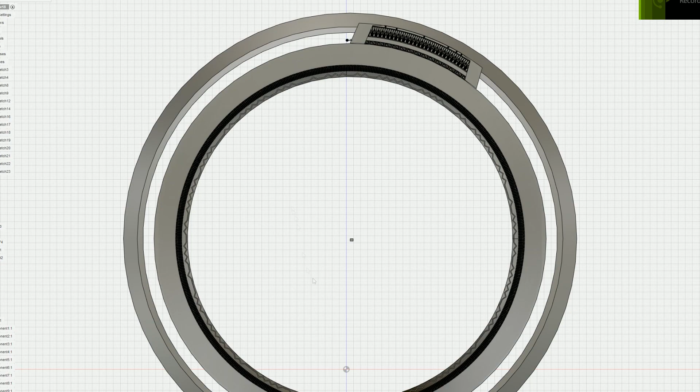Hello and welcome to the first part of a 3 or 4 part series focusing on the design and building of my Working Stargate Miniature Project. In this first part, a progress log of what I've done so far.

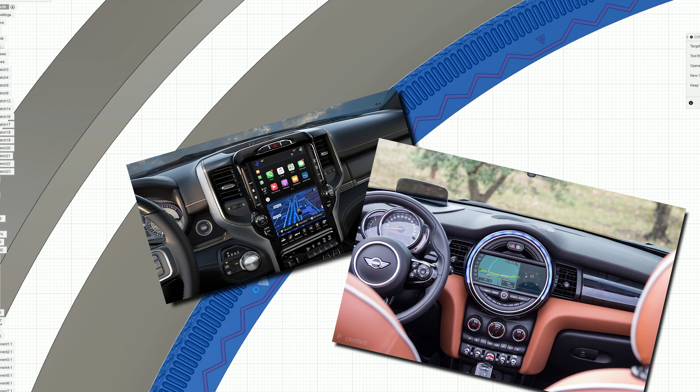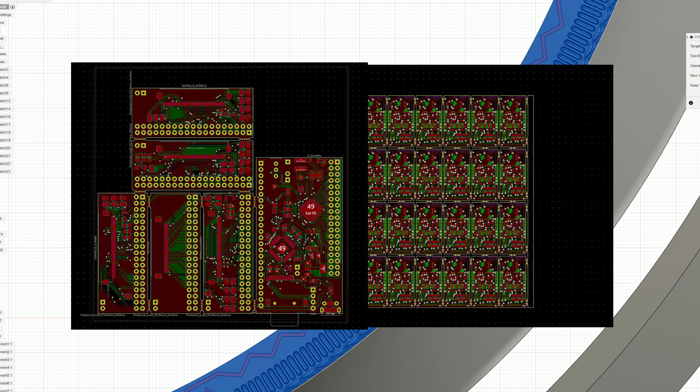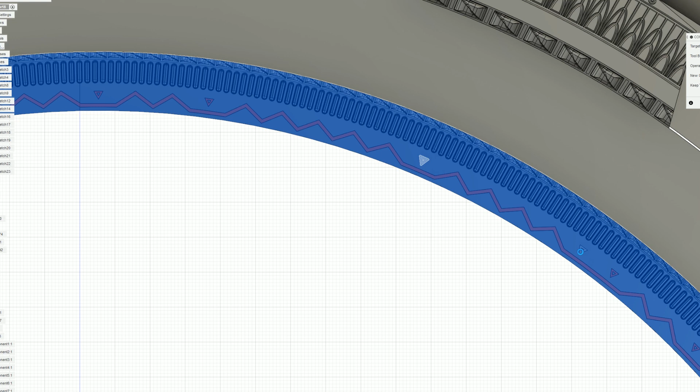So going way back to the end of my last main project video, the retro gaming handheld, I said that my next main project will be the Working Stargate Miniature. At around this time I had already begun modelling some parts of my Stargate, but I then put that aside till the beginning of January. Using some newly found references, which at the time I thought were from the official Stargate blueprints, I started modelling the Stargate. I wanted to bulk out and get the main aesthetics and looks right, before figuring out how to make it all fit together in the real world.

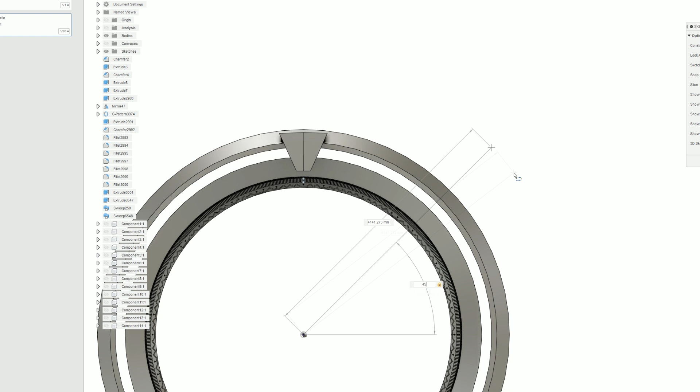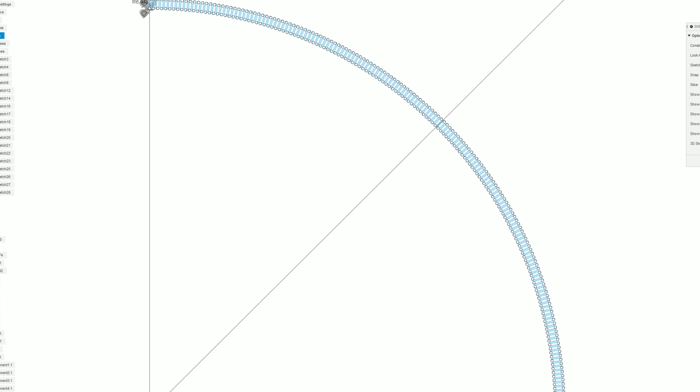Many of the shapes and patterns were pretty simple, so I ended up using the array tool a fair amount, but as some of you might know, Fusion 360 still has some issues when dealing with complex geometry. So I had to also tackle random slowdowns and crashing bugs as the project got more complex. Once I modelled most of the gate, I started to give some thought as to how it was all going to fit together. I already had some ideas in my mind, but if they were going to work was yet to be seen. I knew the main dialing ring was going to be on a gear and driven by a stepper motor, so I modelled that first.

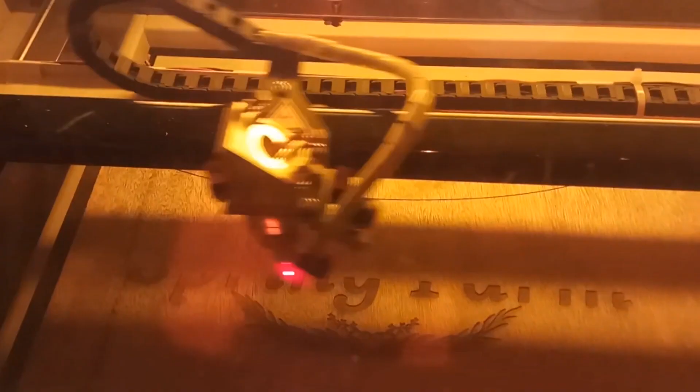And it was around this time that I started to give some real thought into what materials I was going to use. After doing some research, I decided to use POM, also known as Delrin plastic. This plastic is perfect for this kind of project. Not only is it naturally low friction, which is why it's often used for bushings, it's also very stiff and resilient to damage, and it also laser cuts really well. And unlike acrylic, it's also not brittle, so it makes it perfect for gears.

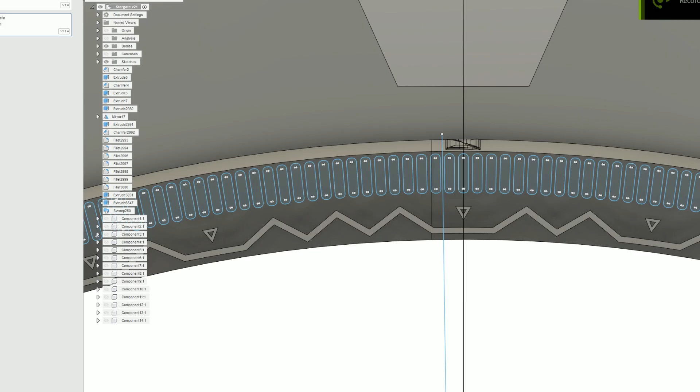The main downside to POM is cost. It's one of the more expensive plastics available. I am currently expecting to spend around £70 for 3, 4 and 5mm sheets for laser cutting. And again, because of its stiffness and low friction, I'll be also using it to make the main framework.

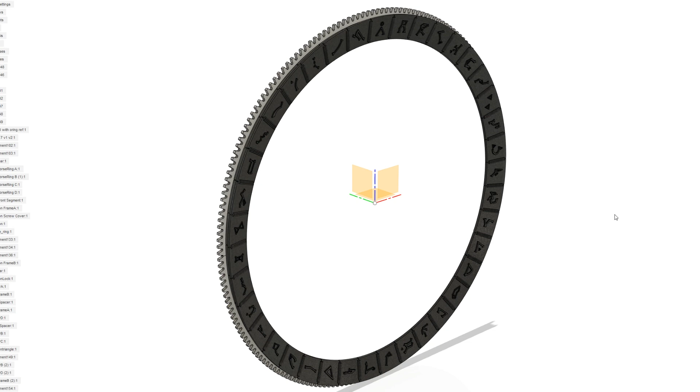One of the first problems I ran into was trying to figure out how to stabilise the dialing gear for the Stargate, to stop it moving backwards and forwards. I came up with many ideas using various bearings that would hold it in place. I had even considered making my gear some kind of floating bearing Lazy Susan, with ball bearings fitted inside the groove around the rim, but I don't have access to the precision tools I would need, such as a profiler mill, to make such a bearing setup.

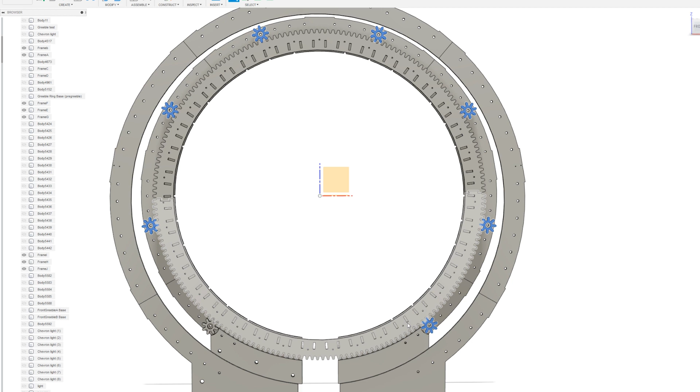After about a week or two of trying to figure out how best to deal with this problem, I decided to just use some rolling idler gears to keep the dialing gear fixed in the X and Y, and use my POM frame to sandwich the dialing gear to keep it fixed in the Z plane.

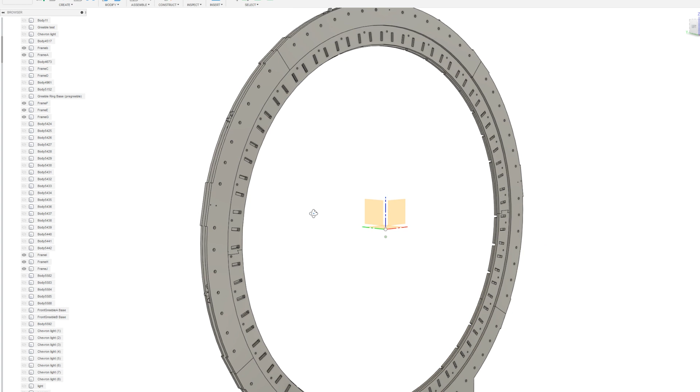The main downside to this will be noise. While POM is a great low friction plastic, there will still be some grinding and rubbing, and so this will certainly be noisier. How much noise remains to be seen or heard, but going down this sandwich route solves some difficult problems when working at this scale, and with the tools I had on hand. I may look into this again before laser cutting and constructing the gate, but for now this is what I have.

At this point I took some renders and showed them to some of the members of the SciFiMeshes.com community. This is a great place I used to be involved with quite a lot back in the day, but had reconnected with over the last year.

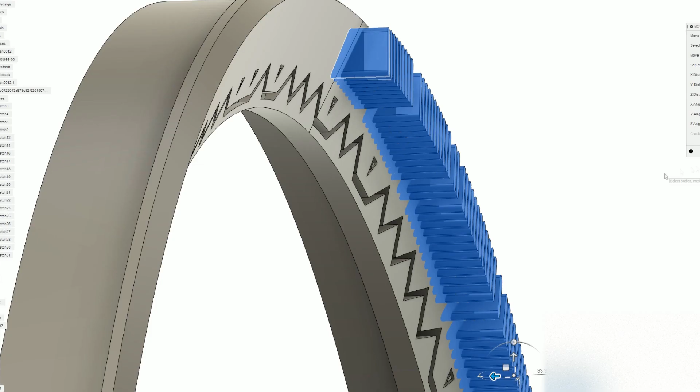While on the whole they did like the model and the detail, they confirmed something which I had been suspecting: my gate was thick. It turned out some of the reference material I was working off wasn't actually from the official Stargate, but some rough sketches from the team behind another full-size Stargate replica project. Sadly, the cross-section drawing I was working with was a bit rough, so I got some of the measurements wrong.

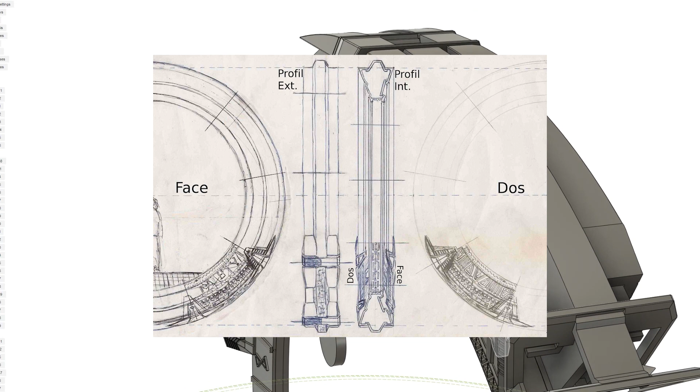But members of the community luckily had some screen captures of the official cross-sections that were sold off at auction some time ago. And as luck would have it, the taper angle of my gate did mostly match that of the cross-section, so for the most part, moving the faces back and in line with the original cross-section was a relatively easy job. However, it did take me a while to correct every part, and did mean I needed to rethink and rework much of my frame design to fit the new thinner profile. And in the end, I ended up with a gate design that I was much more happy with.

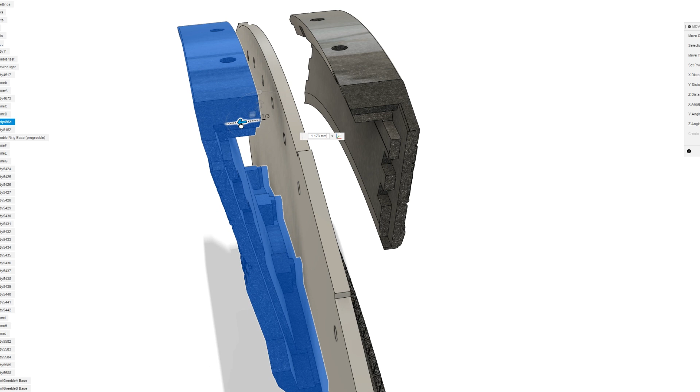With the visual design pretty much done, I started to figure out and model exactly how it was all going to fit together. I modelled in lips and slots for intersecting parts to be glued, and even added some holes where screws could be placed in for a more secure fit. With all the framework and the screws and interlinking model parts, I should have a pretty solid and self-supporting model.

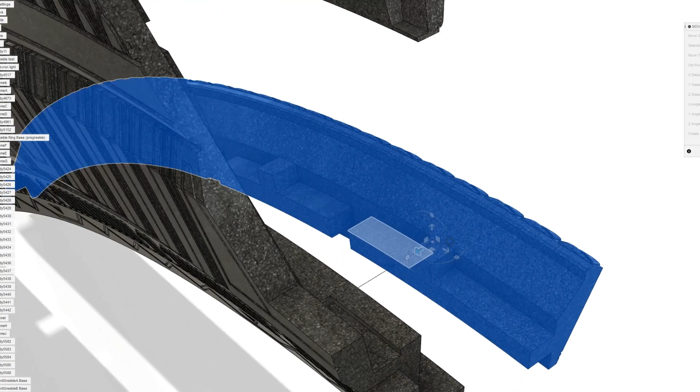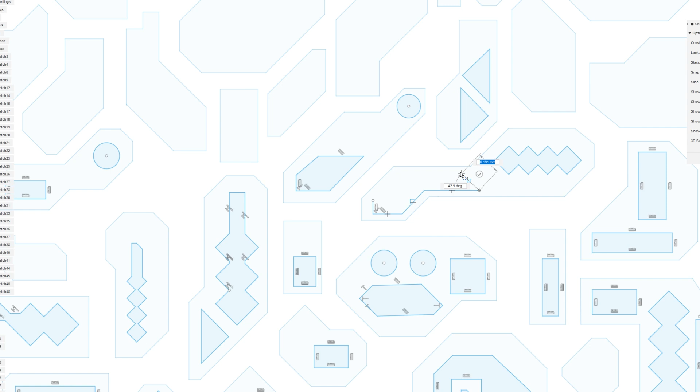One of the big challenges I faced in the modelling was figuring out how to add the greeble effect on the inside ring and underneath the chevrons. In Fusion 360 it's near enough impossible to get this kind of effect in your design, as it doesn't support placing shapes on curved objects, and then extruding across the normal face. So what I did was draw the greeble shapes in Fusion 360 and convert them into a vector file which I could then take into a drawing application to create a height map.

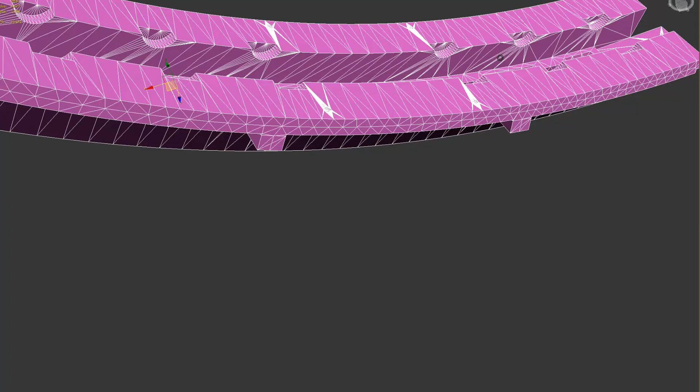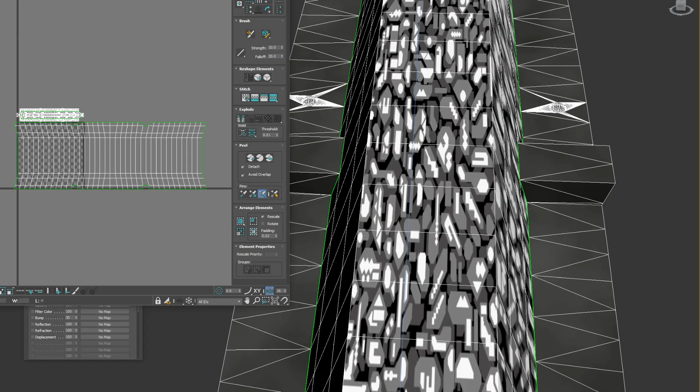After that, I created the base models for the greebles to be applied to and exported them as STL files. I then imported those STL files into my 3D software that I used to use back in the day, fixed up the geometry and corrected any unwanted edge lines, and aimed to get a roughly even space quad layout. I then set the UV projection of my model and applied the texture to the faces where I wanted my model to have the greebles. I then tweaked the scale of the UV, and once I was happy with the greebles texture scale, I then reselected those faces and tessellated the hell out of my model.

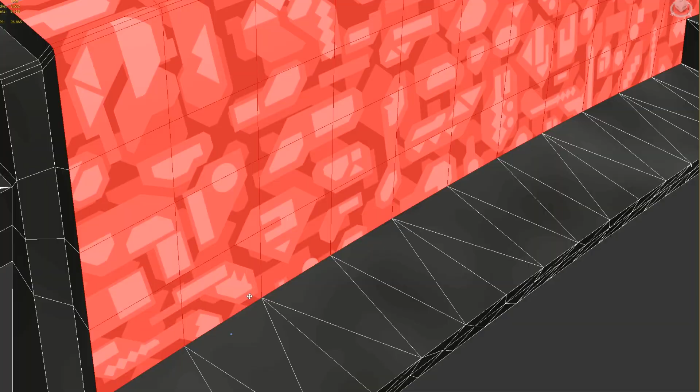I ended up with a super dense mesh with roughly 32 to 64 million polygons, which maxed out my 32GB of RAM and regularly crashed the 3D software. The reason I had to make my mesh so dense was twofold. Not only did I need to get my mesh density down to the scale of the voxel resolution of my 3D printer, but I also needed to deal with the aliasing effect that I'll get between quads when the curves did not quite align with the edges of the greeble's relief effect.

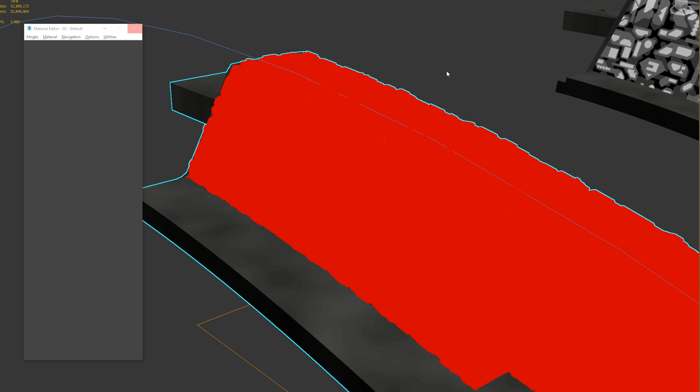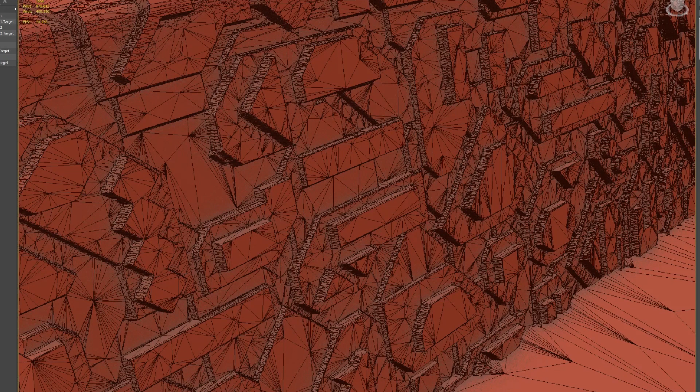After I was happy with the height, I then collapsed my mesh, which freed up some memory, and then applied the optimizer plugins to reduce the poly count into something more reasonable. While the optimizer did make some of the edges rough, this is still in a really low scale area and probably wouldn't translate into the 3D printed model. I resaved these meshes into OBJ files and placed them back into my Fusion 360 project to make sure the greebles didn't intersect with other parts of the model. For the most part they were fine, but I did need to cut out some small sections of the mesh to make it fit better.

The next big thing I needed to tackle was actually something I was starting to dread: the chevron locking mechanism.

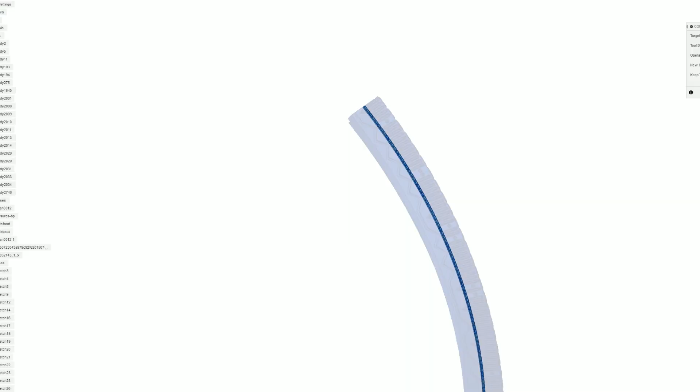By this point I had decided that I will be following the TV show style of locking effect, that being that only the 12 o'clock chevron would mechanically latch on the selected symbol, and this part of the design ended up taking a long time to figure out, as I went through roughly 7 or 8 or 50 different design iterations before I settled on my final design.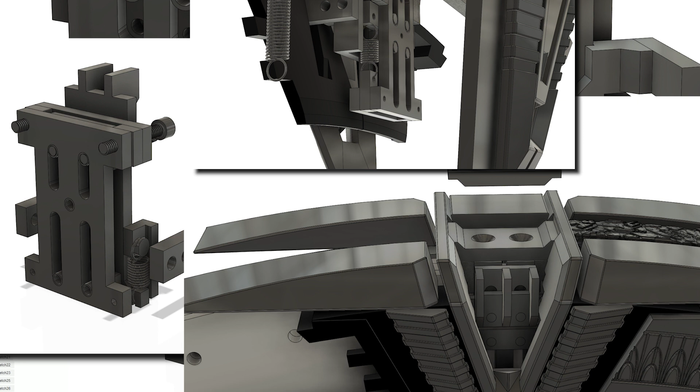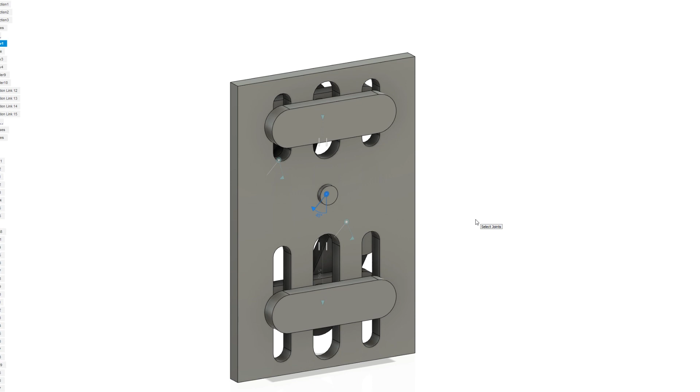The first issue I had was the unequal distance that each half of the mechanism travelled, with the triangular chevron moving down 10mm and the light crystal moving up by 5mm. The first design idea I had was to have a rotating arm, with levers on pivot points that would push the sliders up their guides and back down again. This proved to be really difficult at this scale to design, and created pressure points that would likely have binded the sliders in their starting positions.

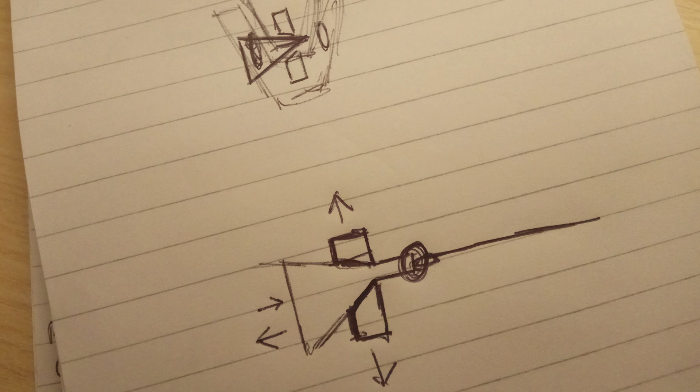After trying out 2 or 3 designs with this method in mind, I moved on to an idea of using a slider that would sit between the 2 halves of the chevron, with the slider having different gradients of slope on each side to push the chevrons into the open position. But sadly again, with this scale I was working with, and the tight confines of space in the model cavity, I wasn't able to make this fit.

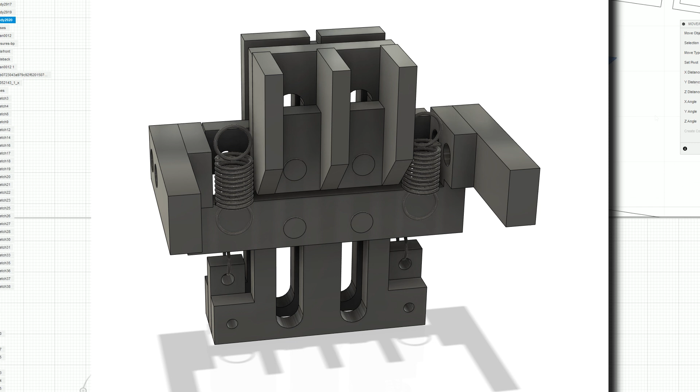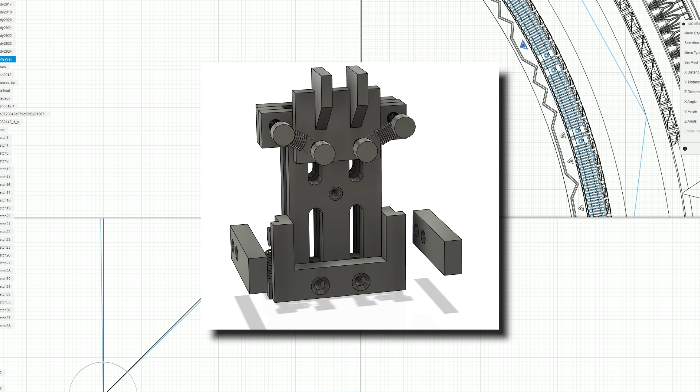With this, I was playing with the idea of using springs that would pull the sliders into the closed position, which led me to start thinking about using wired pulleys to pull the sliders into the open position. And after toying with this idea for a couple of days, I realised again I didn't have the space needed, as there would not be any space for the fishing line to pull the chevron up into the open position. So I reversed this idea. The springs would now pull the mechanism into the open position, and the servo controlled wire would hold the chevrons in the closed position, and release it to the tension of the springs to pull the chevrons open.

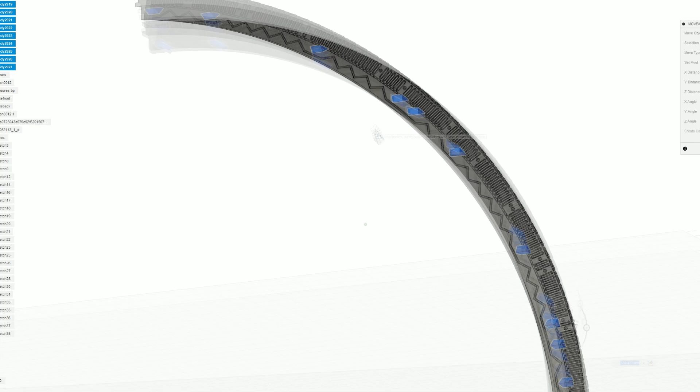At this point I went through about another 3 or 4 designs, mostly trying to find the optimal spring connection points. I've designed this to use 2mm diameter extension springs, which at the time I had only just ordered, and I was unsure if they would have enough tension to pull the chevrons open or closed. But by this point in the design I had spent over 2 weeks on this mechanism and I had run out of ideas, so I started to fabricate one to test. Again, this mechanism used POM plastic that would be laser cut, and would also have resin printed parts that would connect to my model.

And after making this version I realised rather quickly it wasn't going to work. At least the bottom half sandwich plate was too short and would tilt and start to bind with the frame, causing too much friction. But also the 2mm rods I had used to slide in the guide slots also allowed the plate to tilt and bind as well. So this version was certainly a failure. But it seems the principle was sound. I just needed to go back to the drawing board and try to fix those issues. And I still needed to do something about the springs.

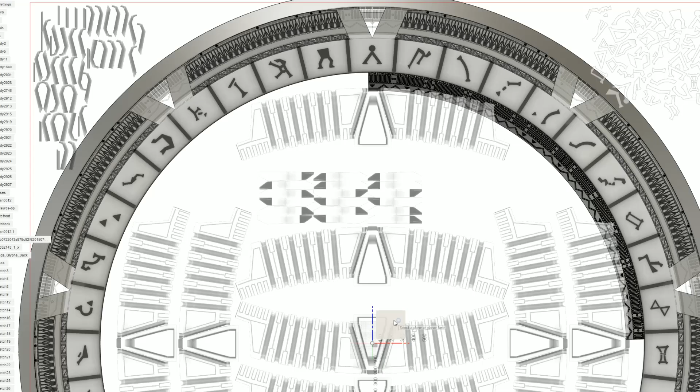I got these springs off AliExpress as I struggled to find any extension springs suitable at a reasonable price locally. £2 to £4 per mini spring with a minimum order of 100 is not what I call reasonable. However, the tension is a little on the weak side, and I wasn't even sure, even with the rails moving freely, if they would be strong enough to pull the plates into the open position.

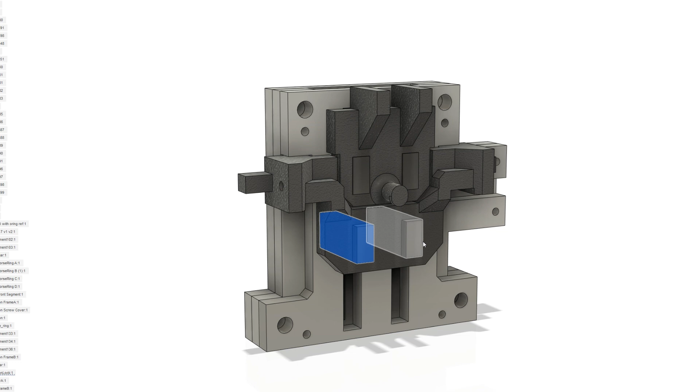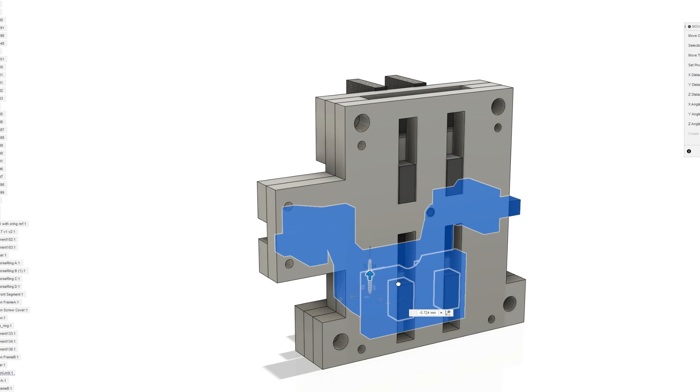So I went back to Fusion 360 and started tweaking the design again. Firstly, I swapped out the 2mm rod strips with POM plastic as guide rails, but because of the increased size, I had to limit my bottom half's movement from 10mm down to 7 or 8. I wasn't too happy with this, so I went back with the rods but added sidewalls. That combined with a longer sandwich plate should restrict the two halves from twisting and binding. Doing this means I could keep my full 10mm of movement for the bottom half. But I'll keep the strips idea in mind as a plan G. Though by this point I've gone through so many revisions on this design I've made my way right past Z and back to A before I lost count.

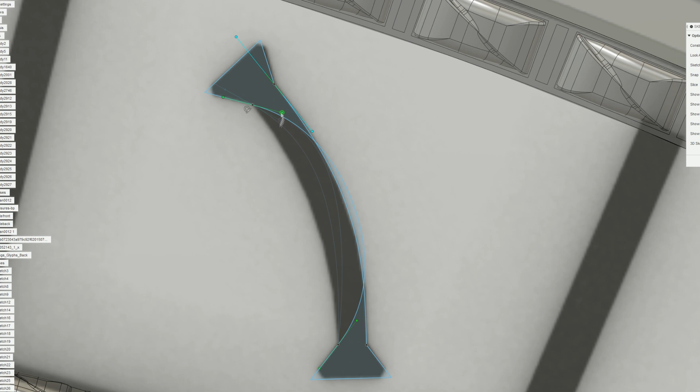I then reworked where the springs connect to help increase the tension. This includes adding this little nipple on the middle of the top half of the chevron mount. Hopefully the Elegoo resin would be strong enough for this scale not to snap. We certainly don't want any snapped nipples.

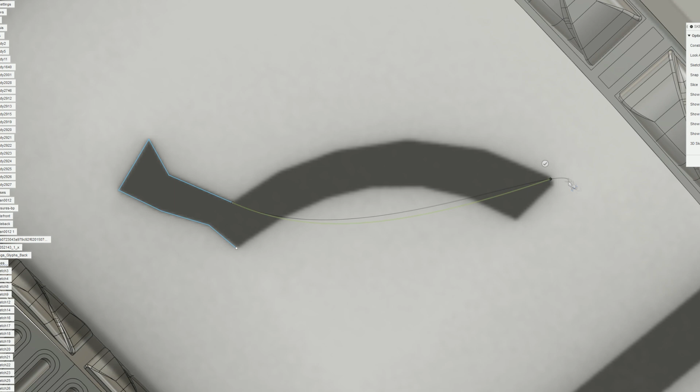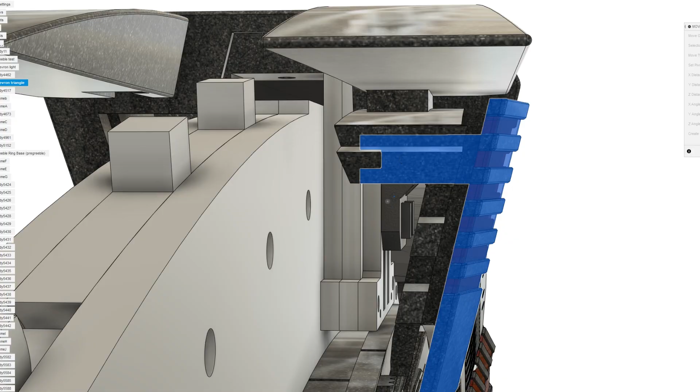By this point I then realised I had made a horrible mistake with how the triangle chevron attached to the mechanism. The chevron model had arms that I had planned would slot in through the front of the model and then get screwed into the mechanism. But I started to realise that would be impossible when the model was being assembled, as there would be no way to reach the screws, let alone wire up the lighting. I had to then redesign the way the chevrons attached to the mechanism, this time with the arms being part of the mechanism and poking out through the front of the model, to which I could then glue the chevron onto.

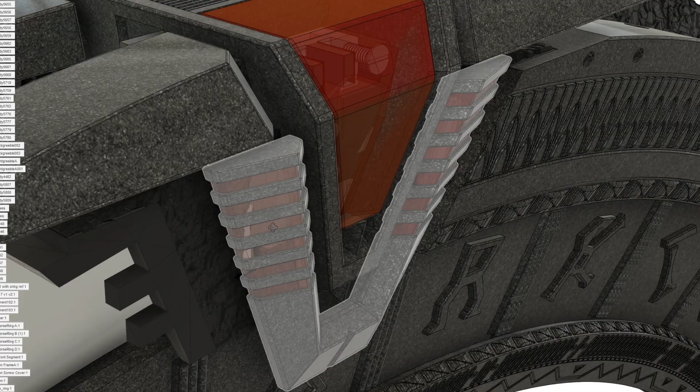I've still not quite fully figured out how the lighting would fit into this, but I'm sure it's something I can figure out a little down the line. And after a few more minor tweaks to the design, I came up with this mostly working mechanism. The two top half springs are still a little on the weak side, but I'm hoping once I receive the 2mm diameter springs, the slight tension increase will be enough to make the top half's movement complete.

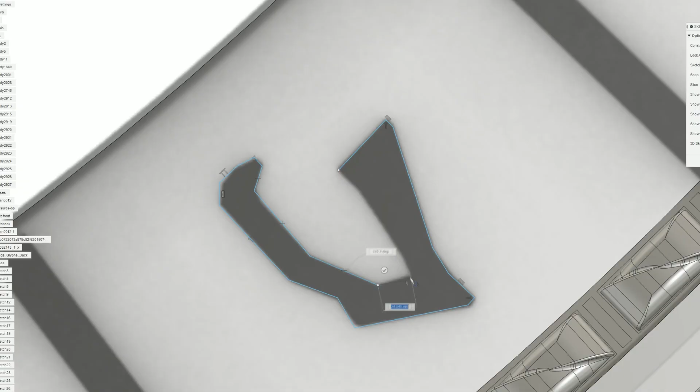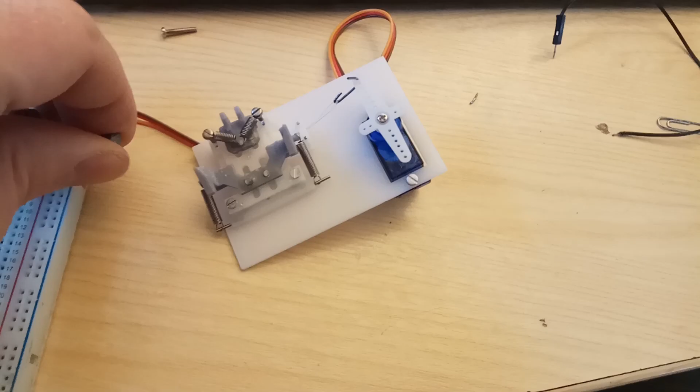The plan is to have a little pulley attached to the end of this loop, and more fishing line fed through a Bowden tube to a servo hidden inside the pedestal. This servo will pull on the loop that will hold the chevron in the closed and locked position. The only question right now will be, is the servo strong enough to pull the pulley without stalling, as this does take some level of force to pull this all the way closed by hand. So I created this rig to test just that, and it doesn't work, so I'm going to have to look for a larger servo.

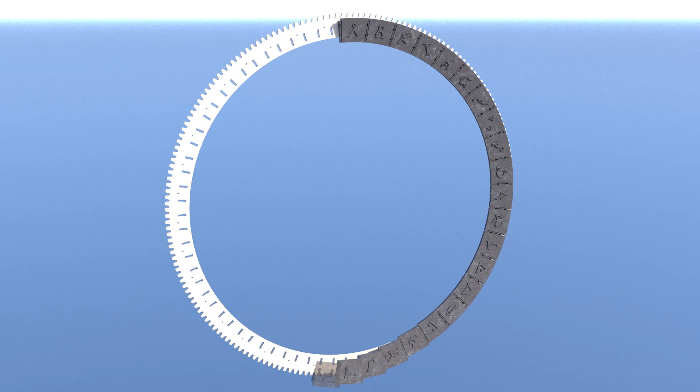Just before wrapping up this video, let's have one last look over the construction of this gate. Starting with the laser cut dialing gear, the printed symbols will be epoxy glued onto the slots and secured with a screw on the back. The main gear will be sandwiched in the frame with the idler gears securing the dialing ring in the X, Y and Z. The inner greeble ring is slotted onto the frame with the guided slots. The front and back faces with the greeble attachments will be secured onto the greeble ring with the screws and glued to the slots in the frame with epoxy glue.

The chevron frames will be placed down onto the greeble rings and frame and then screwed down, securing the greeble rings to the frame, and a cover is then placed over the screws. The chevron triangle and the light crystal are then glued onto the chevron locking mechanism, and then the wings are glued down onto the frame. The back sides of the inner ring mount are glued to the slots on both the frame and the back face model parts, followed by the front half of the inner ring slotted into the back half. And after that, the wormhole emitters are then glued into the cavity of the inner ring, completing the gate part of the build.

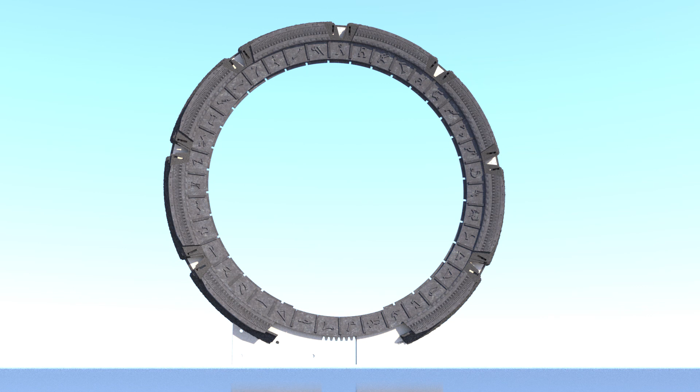So what's left to do? Well, I need to start modelling the pedestal base. While this is an earth gate, I'm going to be giving a stone pedestal as if it was an off-world gate. Because it's going to have this stone look, I'll be doing some base modelling in Fusion 360, mostly for the mechanical construction side and for keeping the accurate measurements, but I'll be taking that model into some sculpting tool to give it a final look. I may also do some heavy post-processing to really give it that proper miniature quality, including a lovely shrubbery.

I also need to design the electronics for this thing, as well as a working DHD. I'm not entirely sure what I'm going to do with the DHD, as truth be told, while I love the Stargate TV series and the gate model itself, I've never really been a fan of the DHD design. I've always felt it looked a bit naff. So expect me to come up with a different design for the dialing controls.

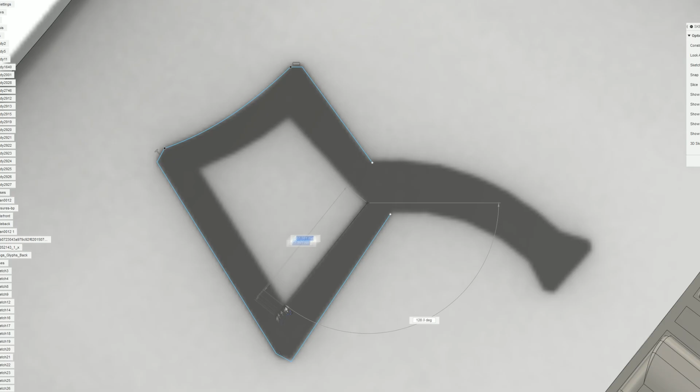Once I have all that locked down, I'll start printing and fabricating parts. I'll be using my Anycubic Photon to print out the high detailed masters with Elegoo ABS-like resin, printing out each part of each section, and then I'll make silicone molds and do resin casts to duplicate them. This being a far cheaper and quicker way to make each section, as casting resin is a lot cheaper than printing resin, and also cures far quicker than it would to take each part to print, with each part taking roughly 24 hours to print.